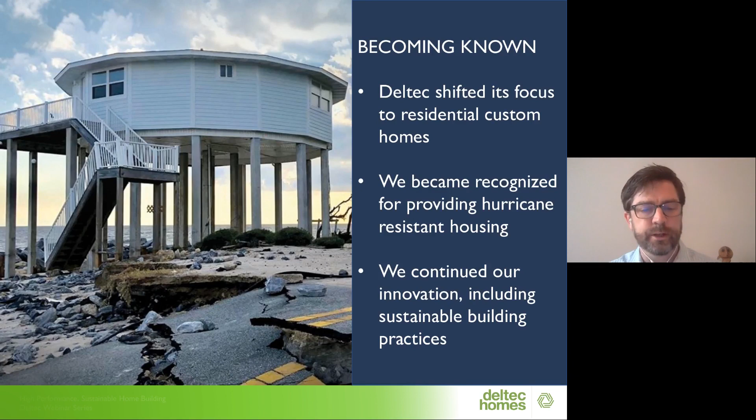But one thing we're especially proud about is that we've continued to innovate, and that includes sustainable building practices, which is obviously why a lot of you are here today to listen to Leigha talk. So we're very excited about that. Where we've really expanded is rolling out additional housing types, to really incorporate sustainability and efficiency into all of the homes that we do.

The 360-degree homes, our hurricane-resistant homes, certainly include a lot of sustainability features at the level at which you want them. But then in 2012, we rolled out the Ridge Line, which took and incorporated a lot of what we learned in sustainability into a specific style that a lot of our homeowners like. This was followed by the Solar Farmhouse in 2018, which was developed in terms of customer demand for a style of house that's very popular in today's world.

So certainly a range of homes, all of which contain a lot of our precision engineering as well as our sustainability inherent in them. We're also a certified B Corp corporation, recognizing the importance of holistic business practices. And where we stand today is that we have over 5,000 homes built, located in 50 states, in over 30 countries and 5 continents.

In fact, some of our recent builds have been shipped to the Bahamas recently. We had a building that was shipped to Palau fairly recently, and we have a house that's in process to be shipped to France. So we really do have a worldwide footprint, as well as a really good understanding and expertise in working remotely, not just for building sites, but also in working with our customers. It's something we're well used to doing over the 50-year history that we have.

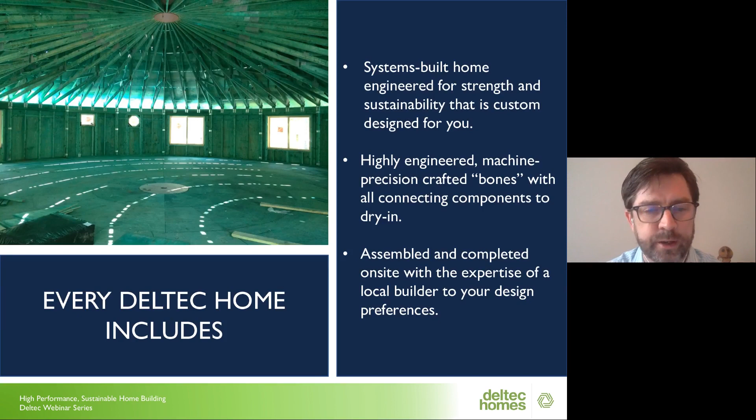This Deltec Way is how we work with you through every step of the process, and these series of webinars are designed to help you with that. That's why I'd be thrilled to introduce Leigha Dickens now to talk about high performance sustainable building. So with that, take it away, Leigha.

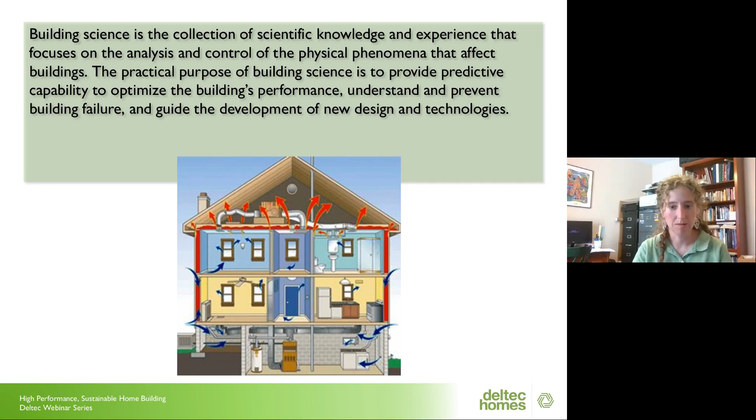So what it's really doing is looking at the house as a system. This picture is showing that. You've got all these different components of the home that seem like they aren't related, but building science looks at how they end up interacting with each other to affect your experience as the person in the home, as well as how the home ends up interacting with the environment around it, and how it impacts the environment around it. That's the sciencey way of looking at it, but that's the way I like to start this process.

The thesis of building science, and of sustainability more generally, is that things could be better. Specifically, homes could be built much better than they generally often are. There are all kinds of reasons one could find; these are just some reasons that really spoke to me.

One reason would be that in 2018, energy use in residential buildings contributed 20% of all US total carbon emissions. So energy use in buildings, including residences, has a significant impact on the environment. And if you look at buildings as a whole, not just residences, it's actually 40% of US carbon emissions.

You couple that with the fact that we spend 70% of our time inside our houses, according to the EPA, and that's prior to the coronavirus. We're now spending much more time in our homes than ever before. So thinking about the environment we're exposing ourselves to every day, and how healthy that is, is a really important component of green building and building science.

On the durability and resiliency side of buildings, the 2019 hurricane season was projected to cause $14 billion in damages, according to the US Central Budget Office, and that was on the residential side only. So from a long-term sustainability standpoint, it doesn't make sense to keep building things that just get knocked down in storms. These touch on many different aspects of sustainable building that people care about, like energy efficiency, air quality, or resiliency.

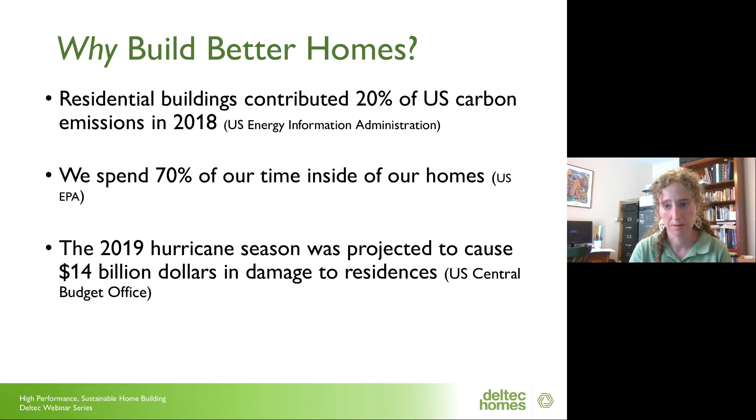So this is going to end up being an overview. I could do in-depth seminars on many of these different technical topics, and obviously in the hour that I have, I'm not going to be able to do that. But I'm going to try and touch on a number of the key and some of the more common and prevalent strategies.

Building science defines this concept of a high performance home, which you'll hear a lot in the industry, paired with green building and sustainable building. The really general definition of that is a home that's built better, that performs better. Specifically it usually means comfort for you the homeowner, durability of the home, the health and indoor air quality of the home, and lower energy use in the home, probably dramatically lower than most homes would have, potentially even pairing that with energy generation in the home through renewable energy to further the sustainability of the home and increase its resilience and self-sufficiency.

An example here would be Energy Star. This is a certificate from an Energy Star certified home, a program put out by the Department of Energy to recognize homes that have features making them more energy efficient. On the bottom is a piece of information from a HERS score, which I'll talk about in a bit. That's a score that assesses how energy efficient a home is on a scale from 0 to 100, with lower being better, and it can predict potential energy savings from that home.

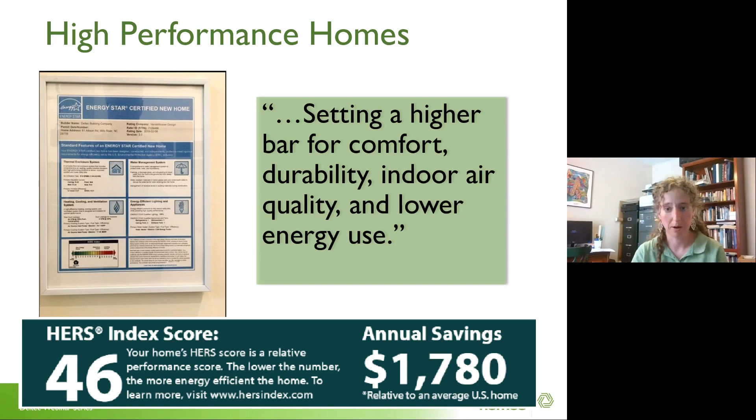I've been working with Deltec customers for almost 10 years now on incorporating all these different ideas into their homes, a lot of times depending on which things are of more interest to them. Just some quick examples in different climates.

This home was built in upstate New York. This is what I would call a high performance home, and it's actually also what I would call a net positive home. So it's time to do a little bit of terms, because another type of home you might hear a lot about if you're doing research in the green building industry is a net zero home, sometimes called a zero energy home, but I think net zero is more commonly used.

What that means is a home that is incredibly energy efficient, so efficient that it becomes feasible for those homeowners to use renewable energy. In this example, you can see they've got a very large solar array in front of their home. Usually with net zero homes, those homes are not independent from the grid—that would be what's called an off-grid home. With net zero homes, those homes are usually interconnected with the power company.

They've usually entered into some kind of agreement. More power companies are doing this, where they basically let you export your excess energy when you're producing more than you need, and pay you for it. You still pay a power bill whenever you draw energy when the sun's not shining, and the idea is your energy bill nets out to zero. That's where the idea of net zero comes from. So these customers, Yosh and Nili, were trying to do that, but they overshot because their home was so energy efficient that they ended up being net positive—over the course of the year, they get more back from the power company than they pay to them. That's pretty nice for them.

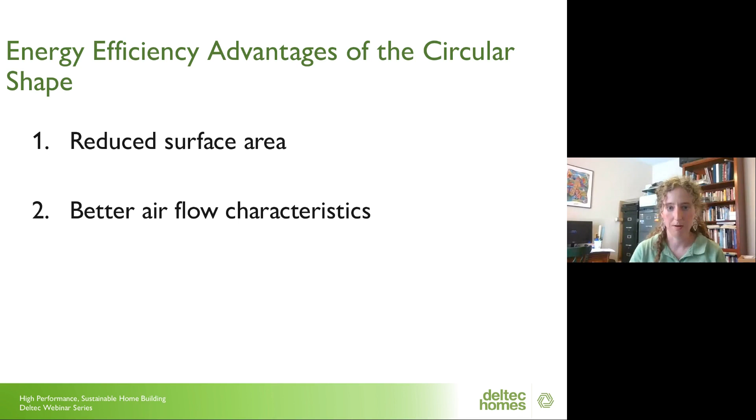People ask a lot, why are your homes round? There's a number of reasons for that, but as a physicist, I'll point out that there is actually an energy efficient advantage to having a round home. That advantage comes from the fact that a round home has less surface area than a same-sized rectangular home would, as well as better airflow characteristics.

So why surface area matters is because all of your walls, all of your roof, and to a lesser extent your floor, are all exposed to outdoor temperatures, and that is where you have heat loss or heat gain. Heating and cooling bills are, in most homes, the largest energy expenditure. So there are obviously many strategies you use to tackle that, but one helpful thing is just having less surface area to begin with.

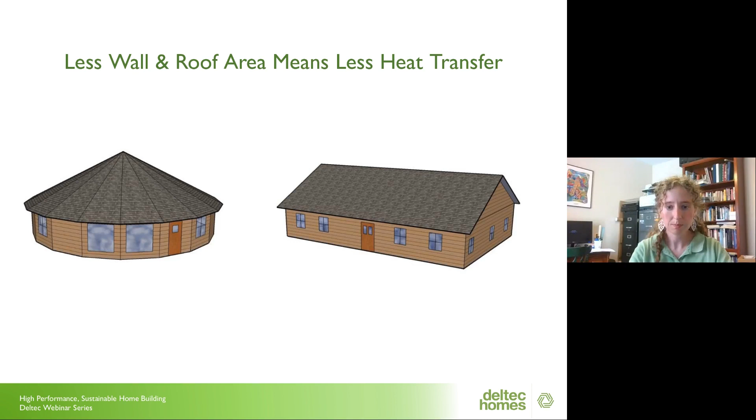So this is an example, a model of two different homes, both 1,600 square feet of interior space—one rectangular, one round. If you actually did the math to add up the area of all the walls and all the little roof sections and everything, in this example you'd find that the round home has 17% less surface area, which is about 600 fewer square feet of surface area. So that's 600 fewer square feet over which this heat transfer happens, which helps make the home a bit more efficient.

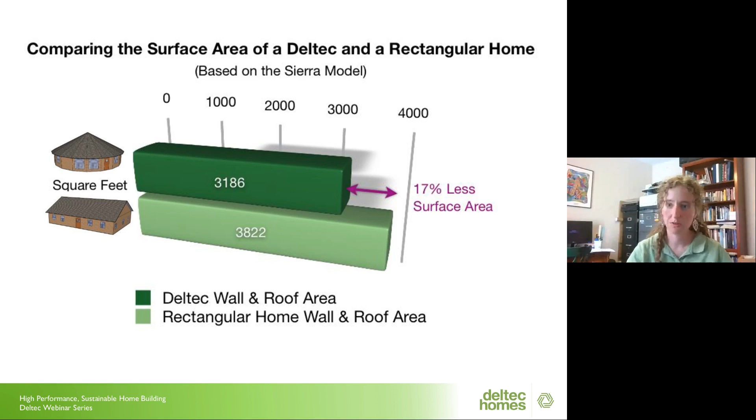The other aspect of the round shape that is beneficial is the better airflow characteristics. Here's an example with a typical home of how, if you have wind building up, it's going to build up pressure on one side of the home and not the other. Obviously, that can be really significant in high wind situations.

But even from an energy standpoint, this can make a difference, because what this can drive is air infiltration, which is cold air seeping into your house. Then your heating system has to kick on to warm it up, and that spends more energy, and vice versa in the summer. Air infiltration is really significant. According to the Department of Energy, between 25 and 40% of your home's heating and cooling costs, which are the biggest energy costs in a home, can be attributed to air infiltration alone.

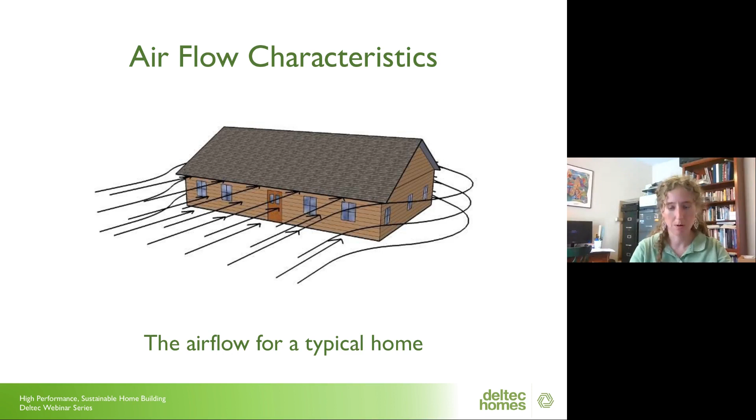So reducing the amount of outside air coming in is one of the bedrock strategies for energy efficiency. You have less drafts building up with a round home. In addition, because our system is panelized, meaning we're building the pieces of your home in a factory, they're going to fit together more tightly. So you're already going to have a more inherently airtight structure because we have to get the tolerances really close.

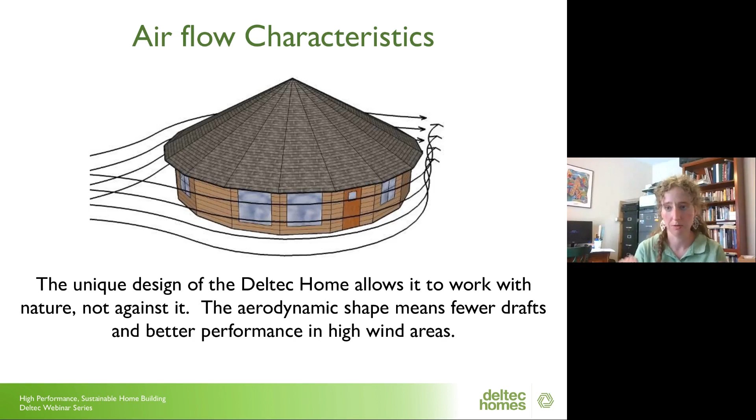So I want to talk a little bit about how to measure energy efficiency, since it is one of the really important and most aspired-to goals of high performance building.

This is interesting because, if you were trying to compare the energy efficiency or fuel costs between two cars, you have a tool that helps you do that. You can look at the mile per gallon rating and know, if I buy this car, I'm going to be spending this much in fuel, and if I buy this car, I'll be spending much less, assuming I drive the same amount. But if you're trying to compare two homes to each other, or two new home designs, it's not always easy to know that, because there are a lot of variables that go into it. So there is a tool to help make this easier for people.

This tool is called the ResNet HERS Index. ResNet stands for Residential Energy Services Network. It's a nonprofit organization that exists to promote energy efficiency, and they oversee the HERS Index. HERS stands for Home Energy Rating System, so yes, that's exactly what it is.

It's a scale from 0 to 100, which is kind of a normalized score, because that is the score that a code-built new home would get. If it didn't have anything special beyond what the law says it's got to have, it would be about that efficient—that's what 100 means. It can go higher, because existing homes built prior to current codes may use way more energy than that.

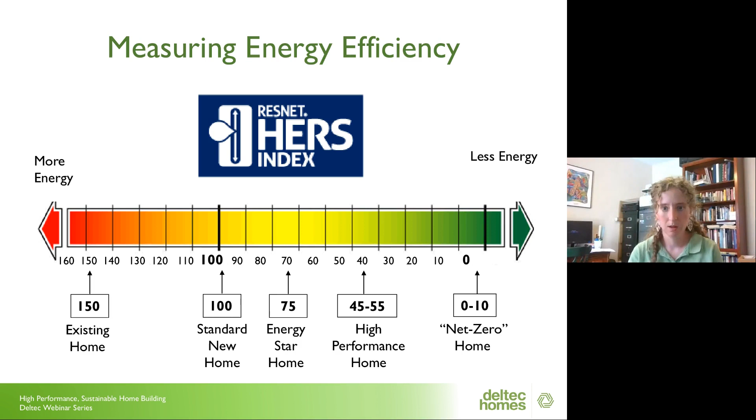It's also an EPA Indoor Air Plus certified home. That's another green building program that focuses on health and air quality. And then it's actually a Zero Energy Ready Home. That's another green building program. There's so many green building programs, it can get kind of confusing. But the Zero Energy Ready Home is actually a pretty cool program to watch.

It's a program put out by the U.S. Department of Energy with a list of requirements. Basically, to do any of these, you have to follow a certain list of practices during construction that are really targeted at that high performance home, that HERS 45 to 55 home.

So this home was a retirement home for a couple. They were looking to have single level living, low maintenance, all those things that people kind of want when they're trying to downsize and simplify their life a little bit. And they also wanted to live more lightly on the planet.

They didn't necessarily know a lot about how to do that, so they used the guidance of my department when they were working with Deltec to make a lot of decisions that really resulted in them being able to do all these cool certifications when they were building their home.

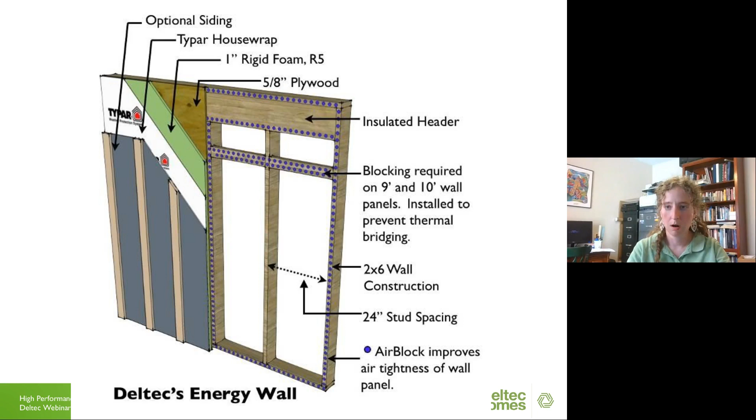So many features are part of this wall, but one I'll point out is our use of exterior insulation. Let me see if I can get the drawaway thing to work here. I don't think I can mess with that, so I'm just going to click through. This is the layer of foam insulation on the outside of the wall.

It's shown behind the siding but in front of the framing, and it is an R5 insulation — we call it R5 thermal shield. When you're talking about insulation, R value is a measure of how insulated something is. The higher the R value, the more insulation.

This gives you plus 5 to your wall on top of the normal method of insulation, which is to put batts or whatever material between the studs — you still do that, but you have this on top as well. And because this is on the outside of the wall, it gives you an even greater benefit.

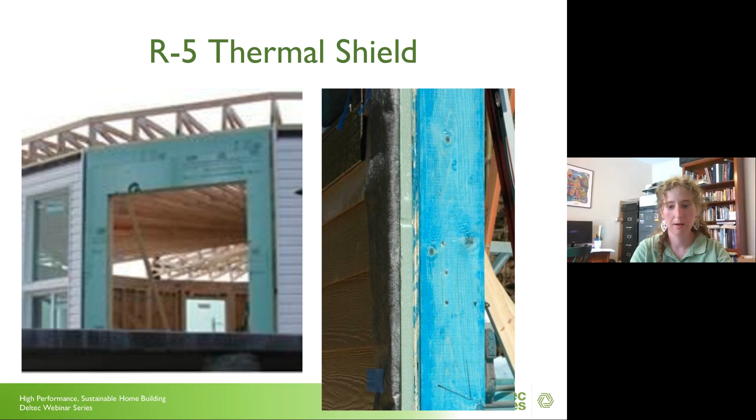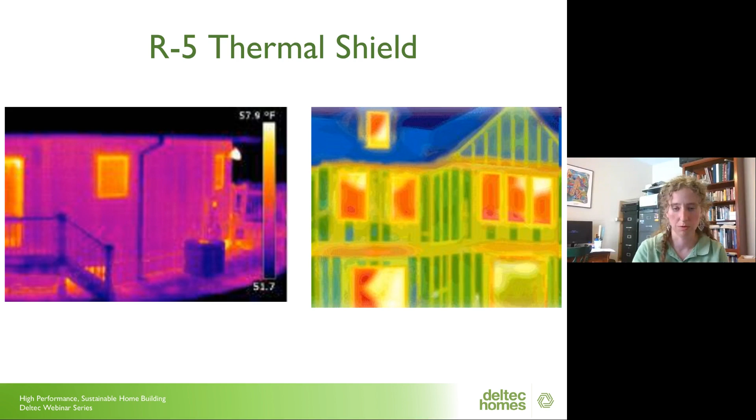The point is wood is a great material. It can be harvested very sustainably, and it holds a house up well, but it doesn't insulate very well. So this R5 thermal shield basically acts like a blanket on the outside of the house, adding insulation over the entire wall, even including the studs themselves, which really reduces the total amount of heat coming out of that wall.

I mentioned before how important airtightness is, how air infiltration is such a big portion of utility bills. This is just another tactic to try and reduce that.

But this is a test that, if you're getting a HERS score done on your home, or doing any of those green building programs, they're going to require you to do this test to quantify how tight the house is. So we do these tests a lot on our homes, and we get very good scores because of all the different things I talked about — panelized construction, that gasket, as well as working with our homeowners to really pay attention to caulking and sealing during construction, at all the different possible places.

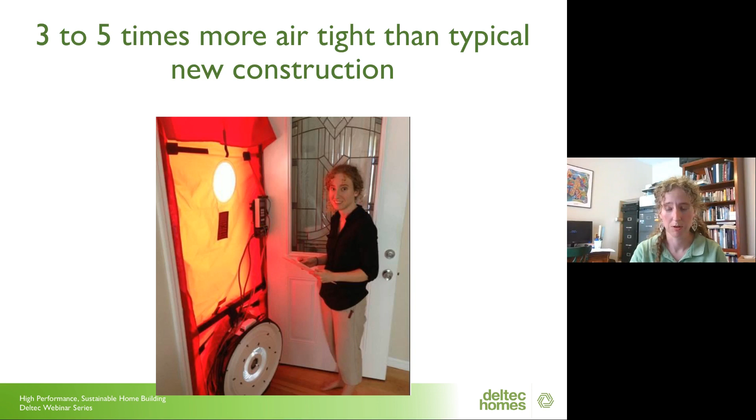We typically get tests that are 3 to 5 times more airtight than you're going to find in typical new construction, sometimes even more than that. It kind of depends on how far you want to take it with going through and trying to find all the holes to seal up during construction.

And that's part of what makes our round home so strong, is this header. So if you want to find more engineering details like that, you can tune into our next presentation, which is going to be about precision engineering.

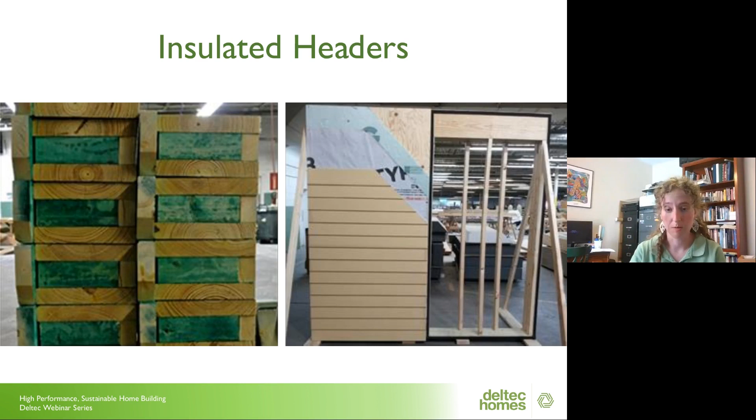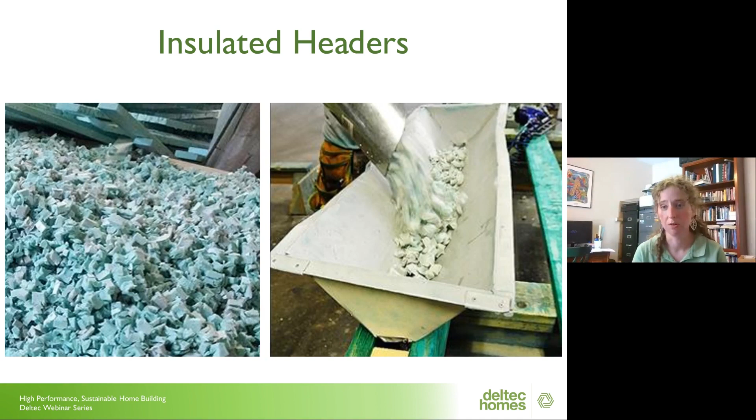Anyway, headers are an item that in typical construction are usually not insulated. They're usually just a box of wood, which again is another weak spot. So we take chipped up pieces of scrap material, of that R5 thermal shield material, and we put them inside our headers in the factory. So we're insulating a material that isn't normally insulated in construction, and we're also using a waste material to do that, which is repurposing and trying to be more material efficient as well.

Since I keep talking about how important airtightness is, I've got to address how that relates to air quality, because that's a really important thing to keep in mind. What these homeowners did, and what a majority of our homeowners do, is incorporate mechanical fresh air ventilation. I could do an entire webinar on indoor air quality, and if there's interest, I'm actually thinking I might do that later this month.

But of the air quality measures to take, I think mechanical fresh air ventilation is the bedrock measure. That's a separate mechanical system as part of the home systems that is deliberately bringing fresh air into the house. We do it with what's called energy recovery ventilators or heat recovery ventilators. Those are mechanical units, and they're balanced, so they bring fresh air into the house through a dedicated duct.

They circulate that fresh air throughout the house. At the same time, they also pull stale air from the house, run it back through this energy recovery ventilator to get some of the heat back out of it, and then expel that air from the house. So it's just breathing in and out for the house, like lungs.

And the reason you want to do that is because, yes, I keep talking about how air from the outside raises your energy bills, and it does, but you do need a certain amount of fresh air to dilute indoor air pollutants and make sure your air stays healthy. So with this system, you're making it happen at a controlled rate. Instead of having a house that just leaks like a sieve with air all over the place, you're bringing in the amount of fresh air you need and not more than that.

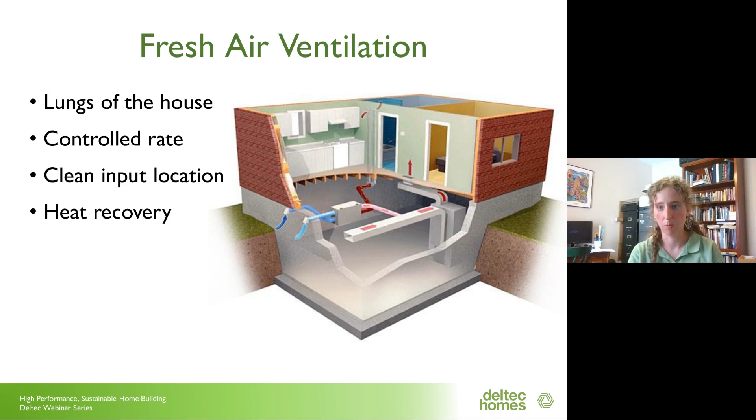So you're kind of taking some of the heat you've already spent to heat the air you're pushing out and putting it into the incoming air. It's not as much of an energy penalty as if you were to open your window on a 20-degree day. The whole point of these systems is that you need some fresh air to ensure your indoor air quality is healthy. But doing it this way adds a mechanical system, making it very controlled. You can add different levels of filtration to further improve your air pollution or health outcomes, depending on what you're sensitive to. But that's a more advanced discussion.

Green building certification programs - I talked about how this example home had three of them, and I do think they're really important. A lot of people say they'll just follow some recommended best practices but don't want to bother participating in one of these programs. I'll put a plug out there that I think these programs are really important because they give you quality assurance. You're not just doing a bunch of things when building your home because I said so. You're doing them because there's a system, a program, that highlights the best ones to do and why they're important and why they affect each other. These programs are based on building science and research in past homes - what works, what doesn't, and what creates problems if you're not careful pairing things together.

When you do one of these programs, you're going to have tests that really help, like that blower door test, to actually test how airtight the house is. You're not just sealing stuff up and hoping - you're getting a quantified score. As well as, if you participate in one of these programs, you're supporting industry and programs designed to make the industry better in a really systematic way. I think that's really important to contribute to while you're contemplating building a sustainable home.

People sometimes ask, are there rebates out there for green building? The answer is maybe - it depends on where you are. If you're building in a city, maybe. If you're building in the middle of nowhere, probably not, but we can look and see.

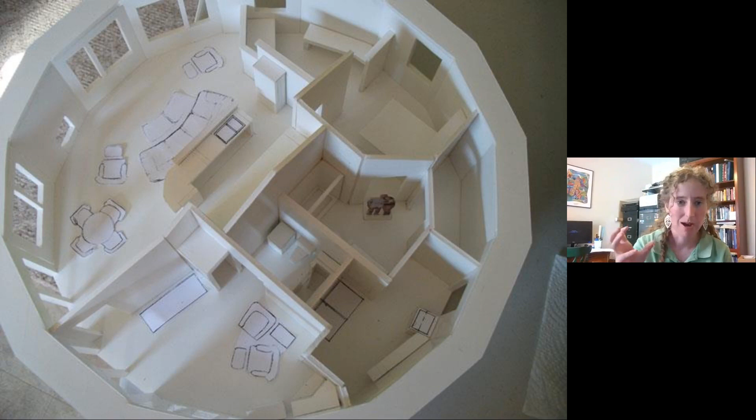So I'm just going to pause here and say this is not a skill set that you have to have, although if you're interested, if you want to get some corkboard going, you can go for it. Jim is a draftsman by trade. We are able to take ideas that you want to have in your home and put them on paper and turn them into actual working floor plans.

But I thought this was pretty cute. So what Adriana is doing here, she was looking at the overhang. She was trying to understand how the sun angles were going to affect her job site because they were really interested in passive solar design. And so what I do, I can help people with passive solar design. That's one of my favorite things to do.

And so in this climate, which is considered a mixed humid climate where it's cold in the winter, it's hot in the summer, it's humid a lot, passive solar can be an appropriate strategy, but you don't want to overdo it in either direction or you could end up kind of uncomfortable.

So what we did here is I looked at her home, and I'm going to see if I can get this drawing thing to work again because my head's in the way. Well, I'm going to get the drawing thing to work.

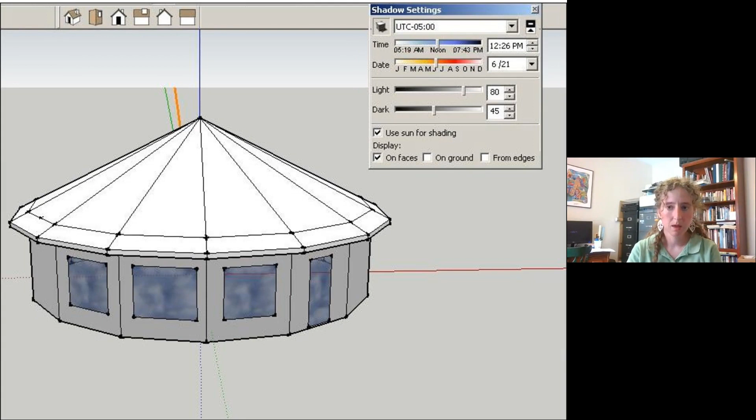Okay, sorry about that. So this is the same view, but it's now on the summer solstice. And the sun is now at the highest angle that it will ever be. And so now I can see that her entire wall is covered in shade, which basically means that overhang is long enough that it's blocking the sun from penetrating that space in the summer, when all that heat would certainly be unwelcome.

So that's one aspect of passive solar design: south-facing glass, the right amount of south-facing glass, not too much and not too little, to get that right balance, as well as the right overhang length.

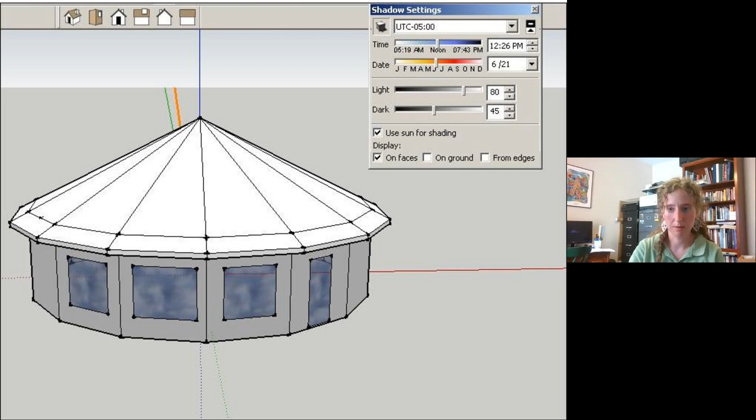And so having that floor where the sunbeams are going to land on it is going to help hold on to that heat in the winter and then slowly release it at night, and then kind of be a heat sink in the summer to help that space from getting too hot. So it really helps modulate the temperature in that space. And that's another core principle of passive solar design.

You combine that with extra levels of insulation, very airtight design, and you can be really powerful in how much you're reducing that home's heating and cooling needs just by the design of the home, before you even get into fancy mechanical systems and things like that.

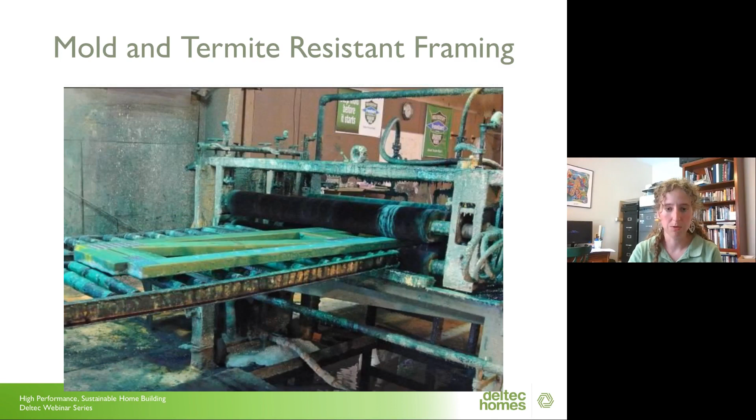That is a non-toxic mold and termite resistant framing treatment, which is something that we are able to do in our Deltec plant. Here is a shot of the structural component, in this case a floor truss, being run through a flow coat machine, that we use to do that.

What that does is it's got some moldicides and fungicides within it, as well as a mineral called borate, which termites don't like to eat. So it basically makes the board not taste good to the termites, and it's a non-toxic way to keep them away from the home. It's not a substitute for also having a regular termite contract, but it can be a really good long-term durability strategy.

And the green is just a dye so that you can tell wood that's been treated from wood that hasn't. So that's something that we offer. It's called Frame Guard, and it would come on all the structural components of your home.

All right, our next stop is going up north now to Bellefonte, Pennsylvania, which is really close to State College, with another 360 Collection home. This home is Energy Star certified again, with a HERS score of 39. It is a larger home, a 2,000 square foot round model with a wing and a garage. It's actually also on a fully conditioned basement that's also about 2,000 square feet, so it's a little over 4,000 square feet of living space.

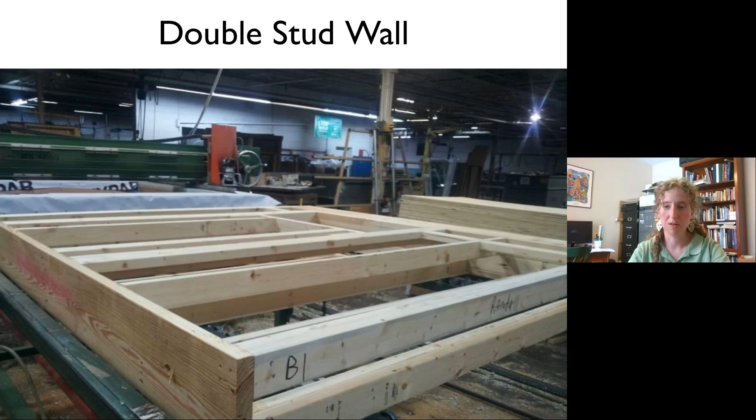He did a similar thing in his roof with some trusses that we have that are built up to allow more space for insulation. He also used triple pane windows. I know you can't tell in this picture, but they're triple pane, with 3 panes of glass to help really reduce thermal loss.

The other thing Chris did, that actually all of our homeowners did, was use our machine finish siding process. Here's a picture of a piece of fiber cement siding, which is the most common siding we see people using because it's super durable, very low maintenance, and has a nice wood-looking look to it. With that same flow coat machine, we're able to coat our boards with paint in the factory.

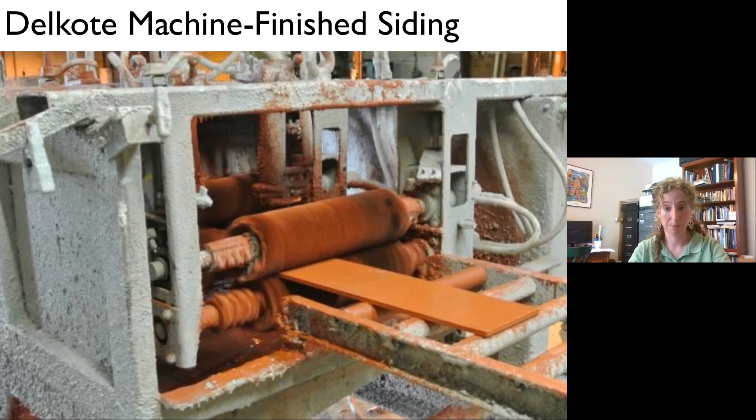So we can actually send your wall panels in the round home with the siding pre-installed and pre-painted, which is nice and fast for you. We can do all the different Sherwin-Williams colors. The benefit of doing that in the factory is that we're coating all 6 sides of the board with paint, even the back, to help protect it against moisture. That process actually offers a 25-year warranty on the life of the paint job, which is pretty low maintenance and pretty nice.

We provide the structural shell for your home, but it's kind of hard to talk about green building without talking about solar in many respects. So it's something that I end up talking to people about a lot. You can even put it on the round roof if you'd like to do that.

The thing about solar, for some people, is it's kind of the holy grail of green building. It's something that could potentially enable you to go off grid if that's something you're interested in, and we're seeing an uptake in interest in that. It's just something to realize about it: it's very scalable. You can do a small grid-tied system now and add more to it later.

I've seen pre-wiring for future solar being really popular. It's more affordable than ever. There are still some federal tax credits available, and depending on where you're building, there can be utility rebates or state rebates.

Another thing I'm seeing that's really popular, especially in the design phase, is thinking about future battery backup, because that technology is becoming more viable and more affordable. So maybe you're looking at a future where instead of being totally off grid, you plan for a future solar array and a future whole-house battery system that enables you to store your solar energy and have it in time of need, but still have access to the grid. There's definitely some long-term resiliency benefits in doing that.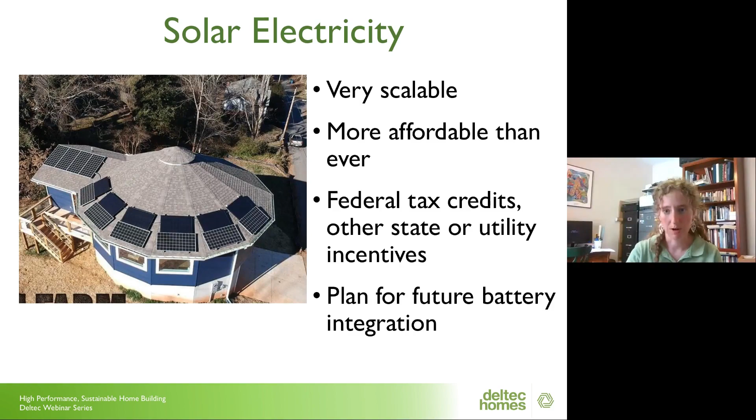But when you're considering solar, I have to remind you once again of the power of energy efficiency, especially in the context of a new home. Imagine for a minute the typical American home, not a new home. Imagine how old it probably is, how leaky it probably is, and how much energy it probably uses. The technology exists to power that thing with solar. It's not really a technology question anymore.

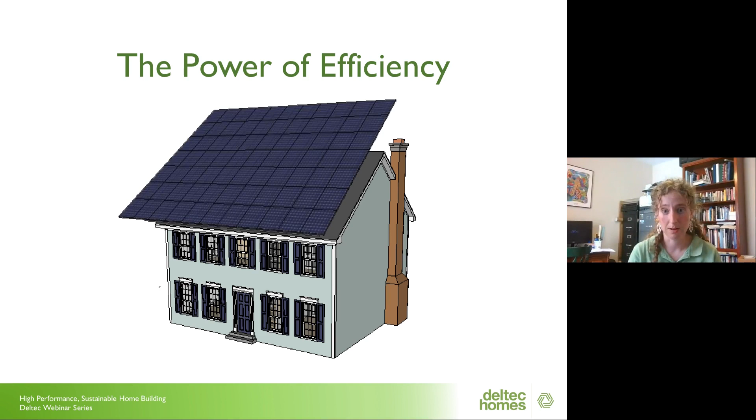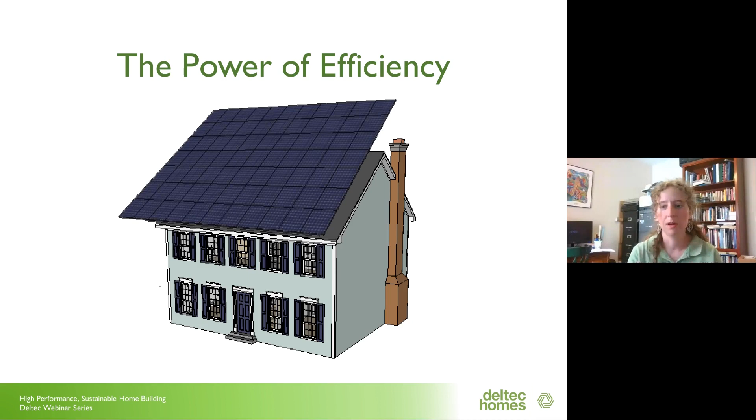But what you might find is the solar array that house needs is kind of untenable. So once again, every amount of effort spent in the design phase toward making the home more energy efficient, making it need less energy to begin with, only makes the possibility of energy independence with solar easier, because a new energy efficient home is going to need a much smaller solar array to provide power for it.

Something people ask a lot, but they don't ask it this way, is: Leigha, all that green building stuff is great, but it seems like it's just really expensive. I'm going to turn that on its head and throw out the concept of how much cheaper it is to build green, really, especially when you're thinking about the long term, about the resiliency, the low maintenance, the low energy bills, and of course the environmental impact as well.

Obviously every custom home is different, and every single person who builds a Deltec home builds a different house in a different place. They're all going to have different energy bills because they're all going to have put different stuff into their house. But I do have a tool I use a lot with clients, which is energy modeling through the HERS score system, where we can actually look at the different design decisions you've made or are considering making in your home, and predict what the resultant energy bills are going to be.

So I did some energy modeling comparing these two hypothetical homes I've been talking about: that typical American home, that existing home, HERS 150, and your new high performance home in that HERS 40 category, before you even consider adding solar to it. This is in Asheville, which is in some ways a milder climate than many of you are building in, but is kind of a good average too, because we're mixed humid—hot in summer, cold in winter, humid all the time.

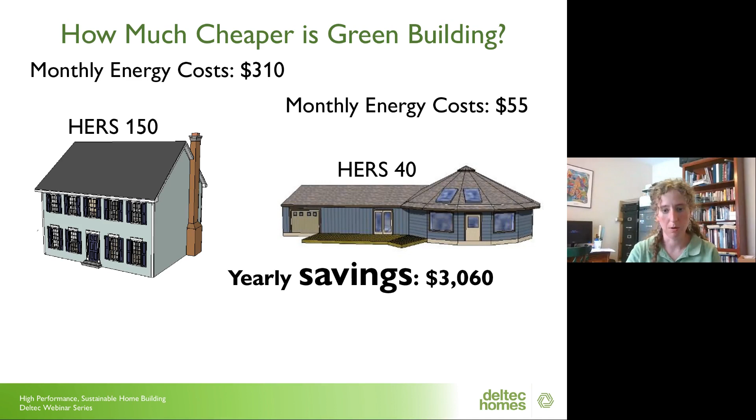And in thinking long term, thinking about the total cost of ownership when you're building a home, another way to look at it is: who would you rather be paying? Yourself, putting a little more money up front into extra insulation, more than you strictly are required to by code, into that better heating system, into that green building certification, versus shelling that money out down the road forever to the status quo.

Solar has definitely grown like crazy since then, but we still have it. It's still providing a portion of our energy. We get the other portion from wind power offsets, so we are actually a 100% renewable energy powered facility. So that's cool assurance that when you build with us, not only am I going to help you build a more sustainable home, but the way our homes are built, our manufacturing process, is also something that as a B Corp, we are optimizing to be as sustainable as we can make it.

Another piece of that, of course, is waste. One interesting benefit of panelized construction is the ability to reduce the amount of waste associated with the project. We are building our home in a factory where we are able to utilize our materials together a lot more efficiently. So one of the things I look at is how much waste we are producing. We have different programs like reuse programs, donation programs, recycling programs. Through those programs, we are able to divert over 80% of the waste from our product from the landfill and have it go somewhere back into the reuse stream.

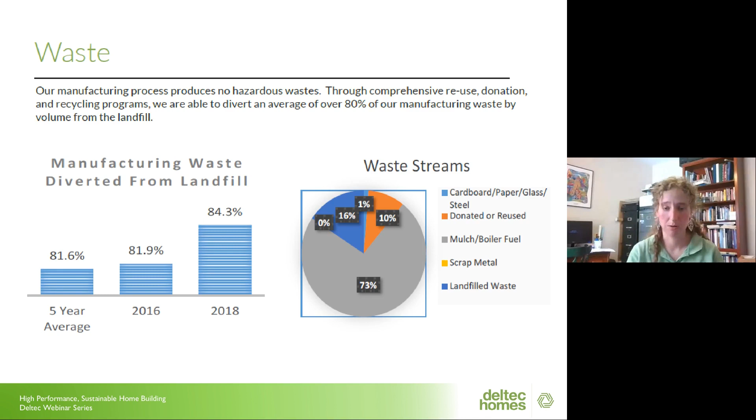One of the handouts I have for you is our sustainability report, which goes into a lot of detail. It has some case studies on some homes, and some facts about energy efficiency, certification, and all kinds of cool things, so I just pulled from that. Again, we're able to donate an average of 80% of our waste material, diverting it from the landfill. The average HERS score that I have on record for Deltecs that have come back to me was a 45. So our average home is in that high performance category.

And as Scott had mentioned, we are certified B Corp, which is kind of like a green building certification program, but it's a program that businesses have to go through, where we submit our environmental practices, our corporate practices, how we treat our employees and how we treat our customers to some scrutiny. We have to meet a checklist of requirements to be able to earn the right to call ourselves a B Corp.

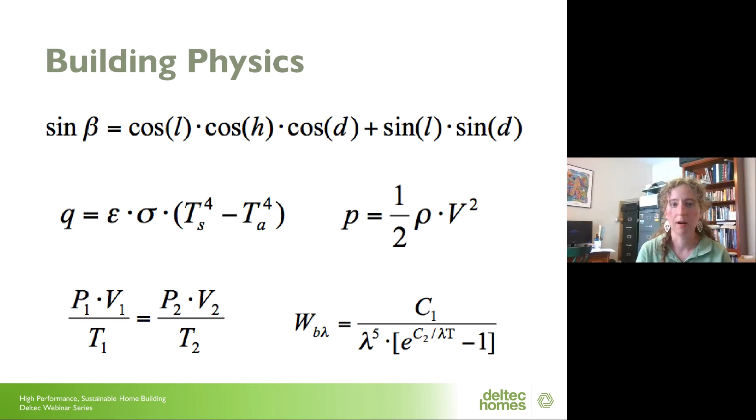So with that, I will thank you all for your time, and I hope to hear more from you as you work with us to design and build your green homes.